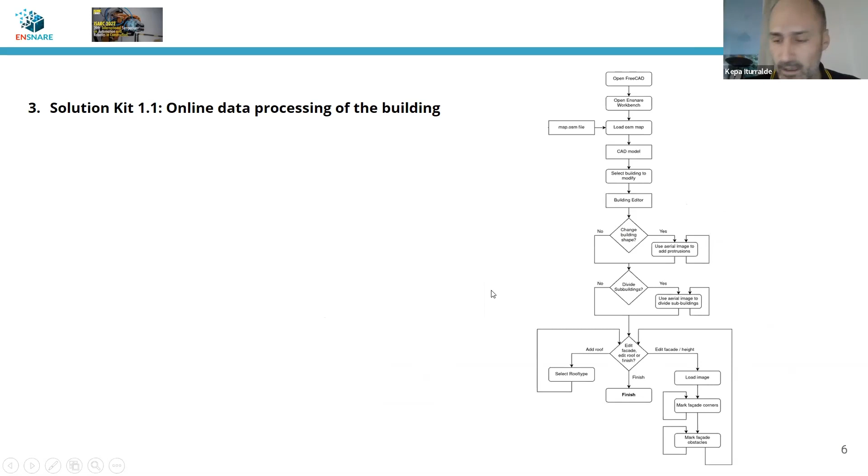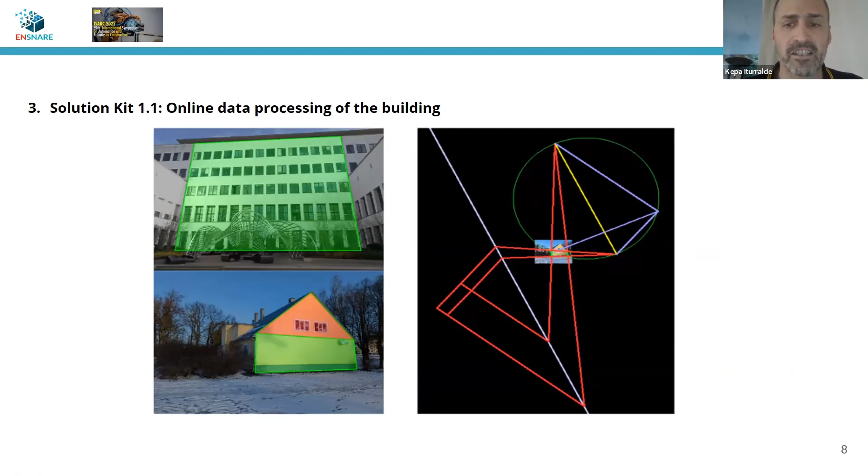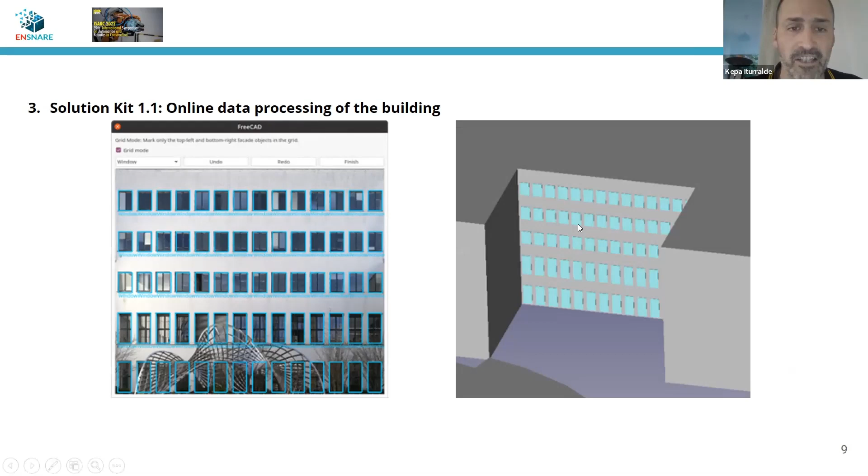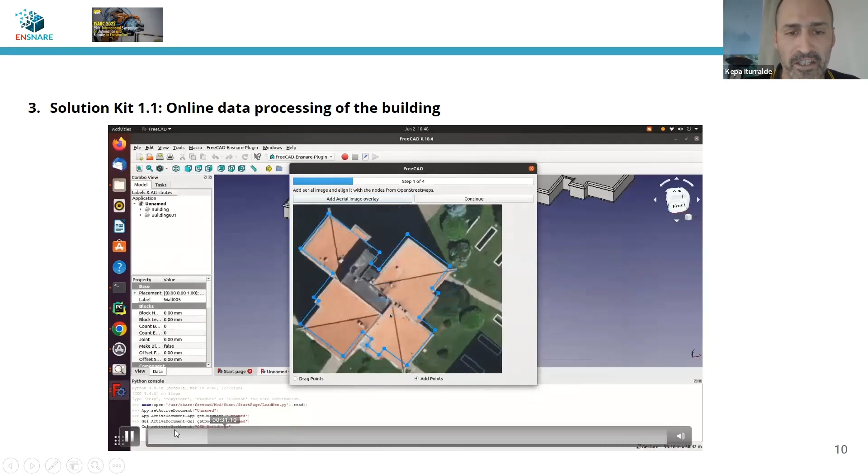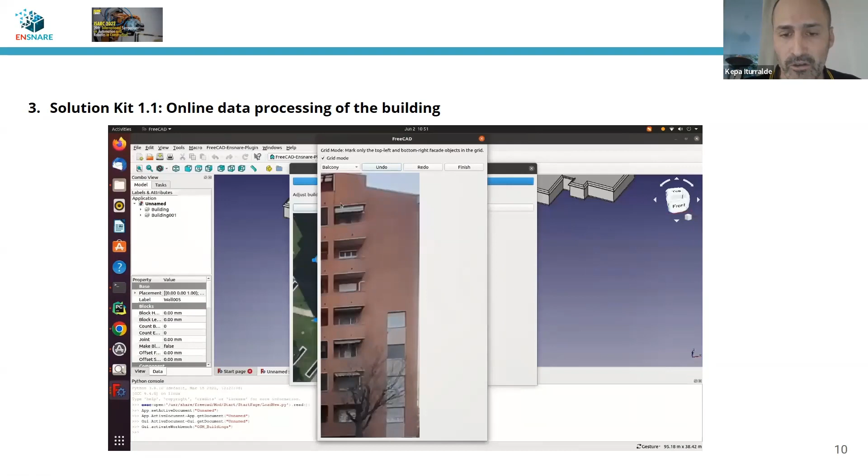So we first import the information from OpenStreetMaps. Then we use aerial data, aerial pictures, to match the OpenStreetMaps with the current information. We use pictures for defining the shape of the facades. We can select the windows manually. We are now in the process of recognizing the windows and balconies automatically, but not for this paper. We didn't have it ready yet.

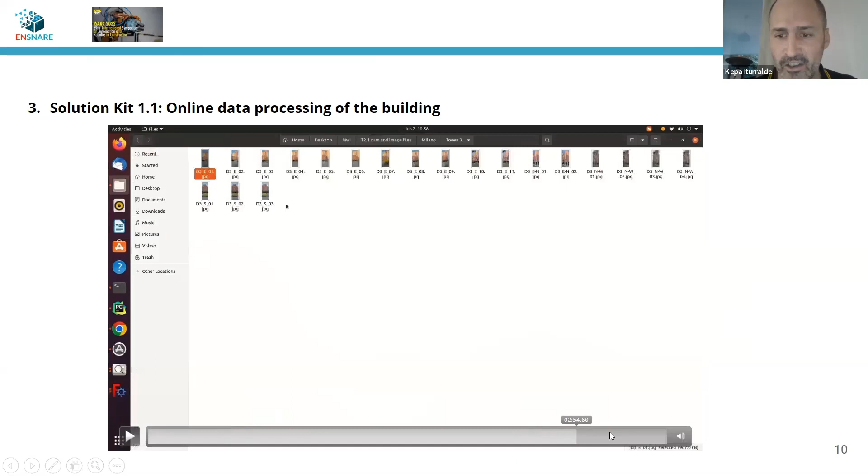We recognize it, and at the end of the process, we are able to define the building. So with the building already,

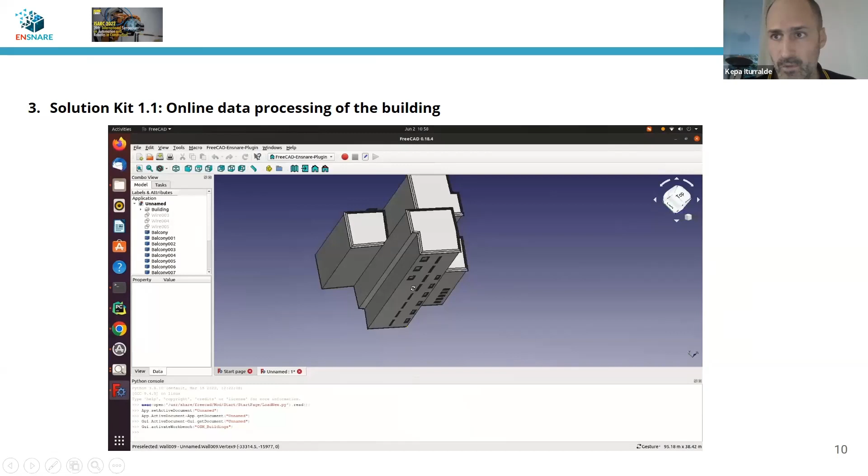One moment. My program needs to be restarted because of the video. 1 minute, please. Yes, go ahead. Take your time. Only one, I guess 1 minute. Okay. Sorry for this. I wanted to do this a bit faster. Okay, now you can see my screen again, right? Yes.

So we generate the building model. We have the building model already. And with this information, facade by facade, we can define the shape of the modules in a few seconds by an algorithm we developed. We optimize the amount of solar cells that can be added on top. The solar cells are not that problematic, but the hot water solar absorbers are quite problematic because they are standardized, they have a defined shape. So we need to optimize.

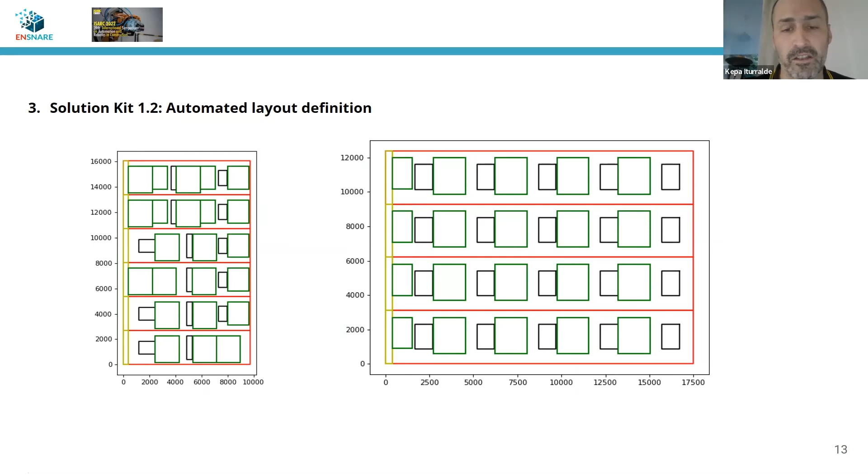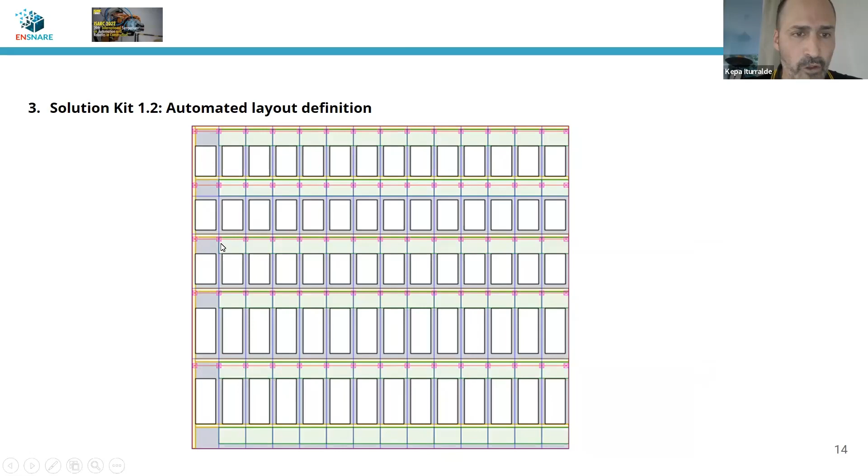In this project, we are using 12 different sizes, and you see here in green the algorithm we developed and how we optimize this shape to optimize the amount of area that we can cover with these solar absorbers. We don't only define in this process the layout of the modules, but also where the connectors should be. So we can say that the connectors need to be placed in that area, and we have developed, by using April tags and OpenCV libraries,

a way, by using pictures and not a total station, to measure more or less automatically the location of these targets or April tags. Again, those locations are where the prefabricated module connectors will be placed. And you might say, well, placing these connectors might take a lot of time, which is true. We realized in previous projects that this is a very time-consuming activity.

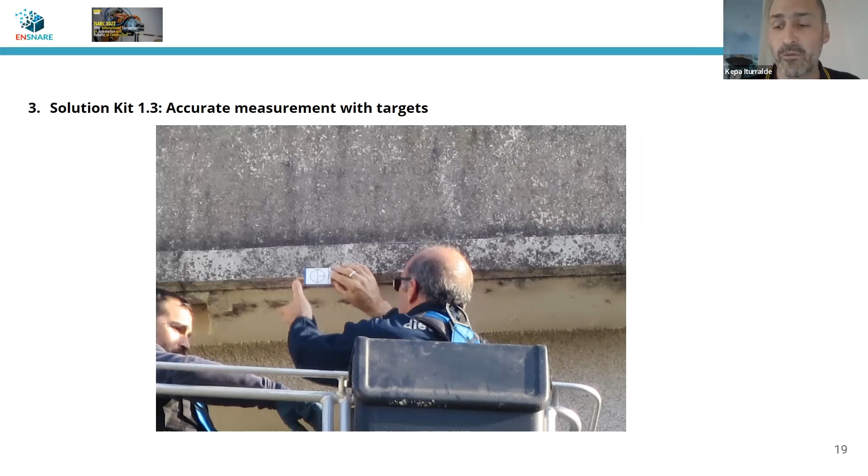We also used in the previous projects 3D point clouds and so on. I'm not very happy with the result of that because the accuracy was quite low. And that's why we are developing in this project also a way of using a drone for placing those targets. That's explained in the paper.

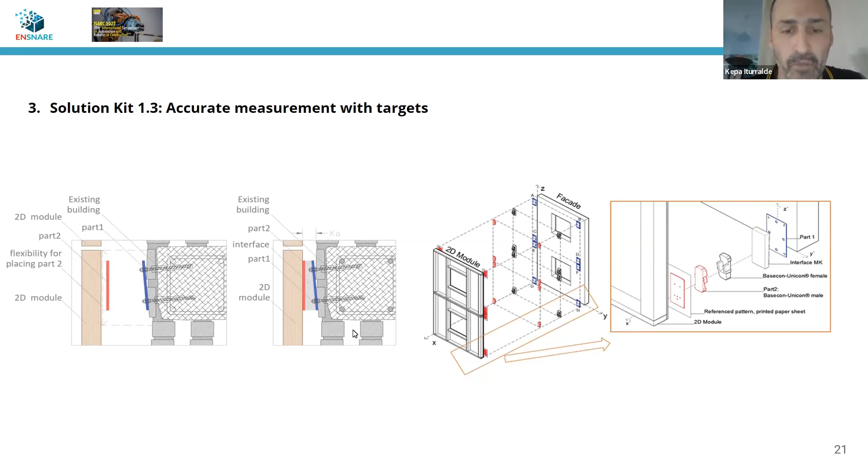We might have some inaccuracies while placing those first targets on the existing building, but then we can solve it using the so-called matching kit interface. But this is something that's already explained in previous literature.

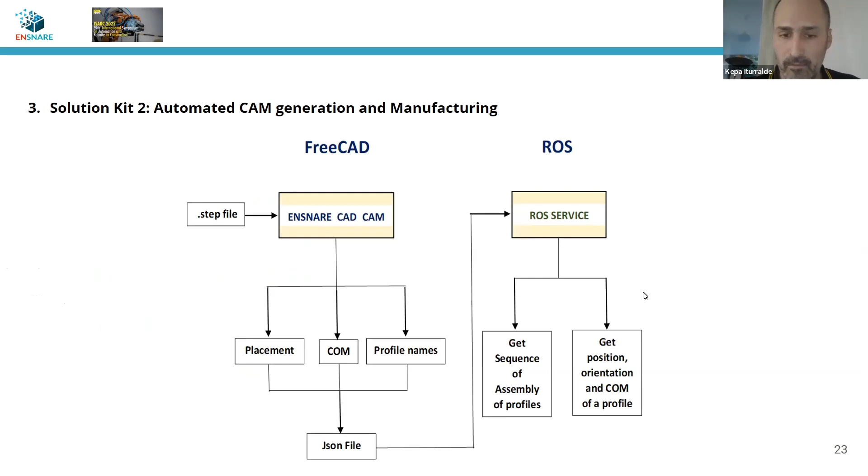So, two minutes to wrap up. With these prefabricated modules, we are also experimenting on how to automatically assemble the modules using robotics. First, we made some simulations in ROS, connecting every prefabricated module's CAD or drawings with the CAM of the robot.

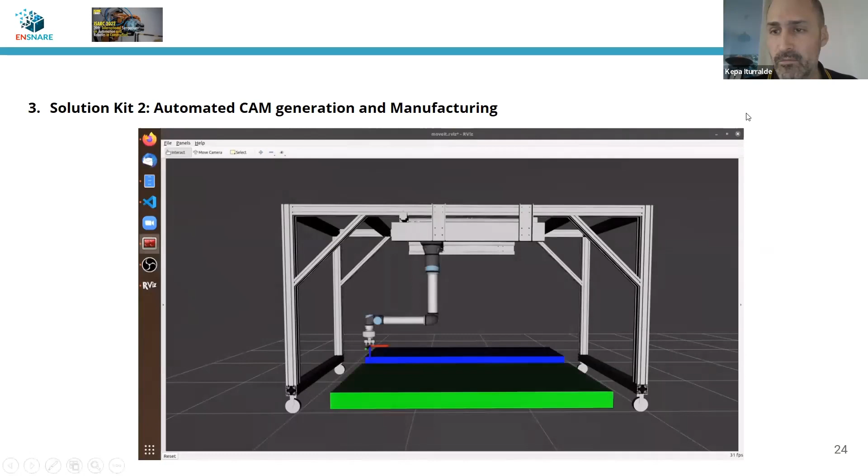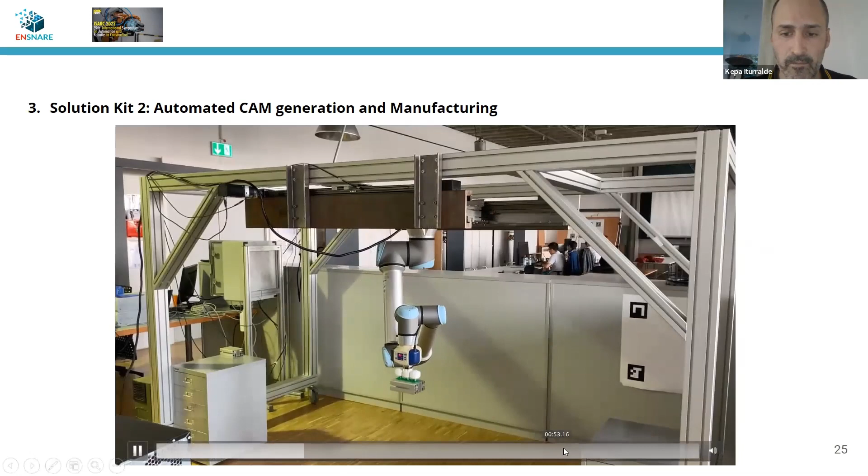And lately it's not only simulation. We have done some experimentation also in our lab. This is quite slow, but we are performing okay.

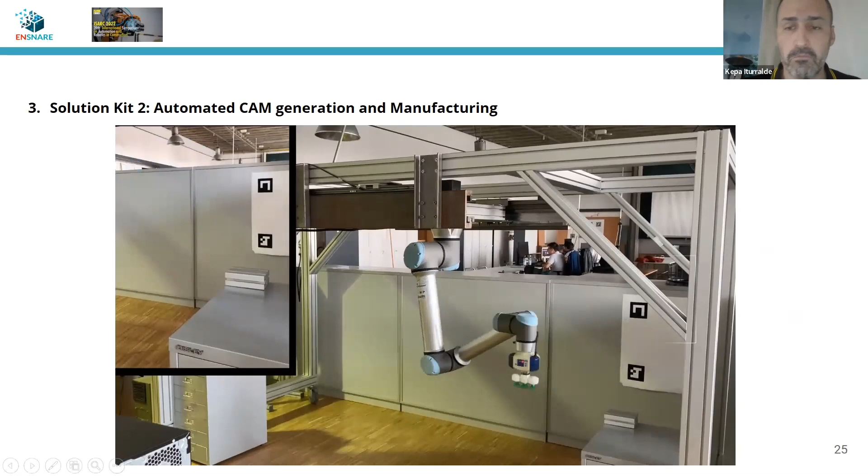Now we are in the initial phase, but this is all still a work in progress. Well, it was a work in progress when the paper was submitted. Now we have made some advances, and we are looking at how to get closer to the market by applying this technology.

So thank you very much. As I said, this is project-based research. There are plenty of partners in this research, and it is funded by the European Commission.

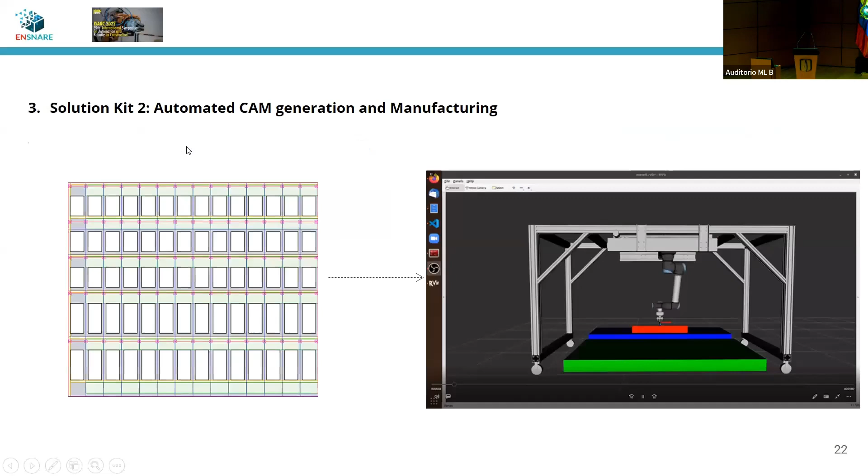This is Varun. Professor Dr. Kepa, I have a question. What are the pre-settling activities required for this kind of experiment to be done? I have seen your presentation at the last ISARC where it was presented as the best paper. What does a company have to do if we want to start on a new project?

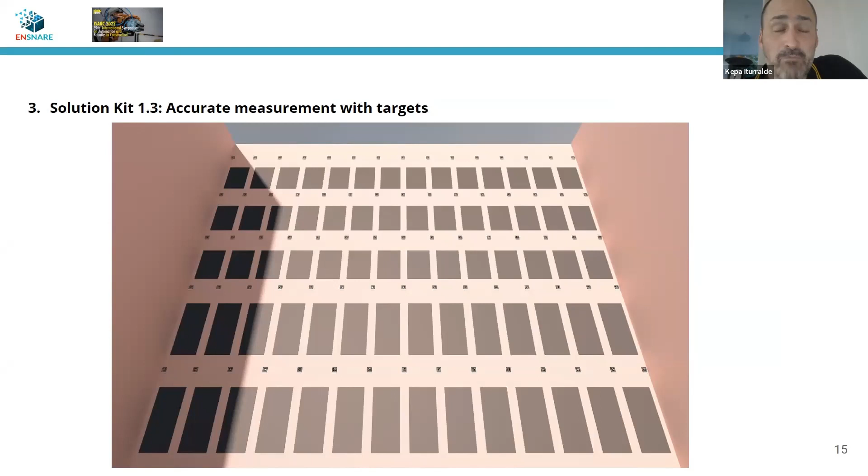Well, there are different aspects in this case. The previous project was based only on facade installation, but in this case it is for building renovation, facade building renovation.

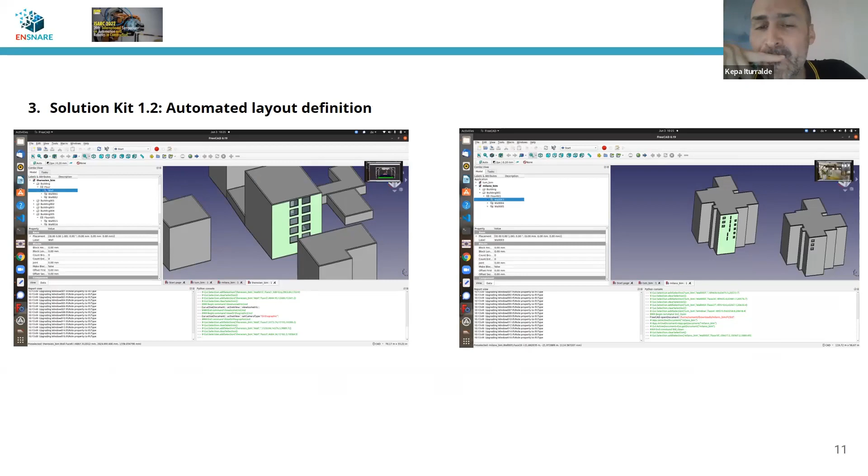Is your question what is necessary to get the project, or what kind of information we need for developing the facade? Okay, so my question is about practical implementation. Once you have all the things set up physically, if you want to install, what would be the stepwise pre-step procedure, like for installing the robot?

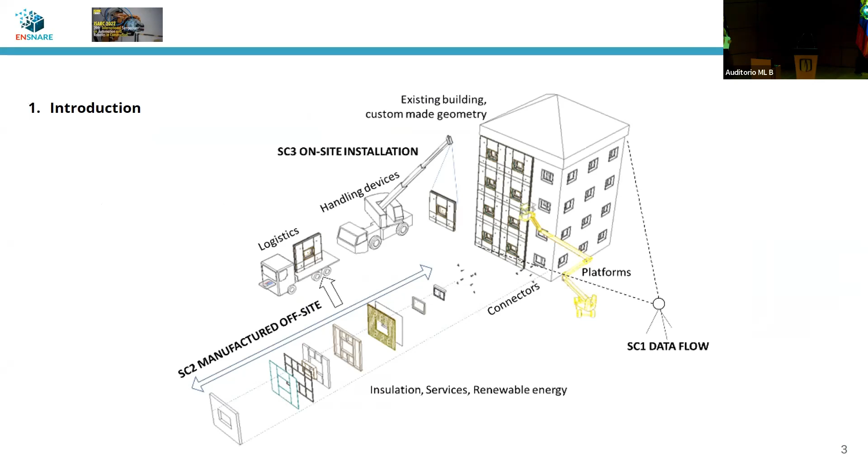Well, in this case, for the installation process, as you can see here, we are not using precisely an installation robot. We are using a crane, which requires positioning within the built environment. In the previous project also, the robotic device had to be positioned in regards to the built environment. In that case it was a building structure, but you need to position somehow because you have plenty of references, and you need to reference your robotic device in regards to the existing building.

In this case, we will use April tags at a known position to locate the crane in regards to this April tag. Probably the crane will have some April tags as well, and we will use a quite powerful camera to locate with sufficient accuracy the location of this crane.

But I would say in building erection, so in new buildings, not only in building renovation, the issue is the same. And it's the same in the rest of the industry. If you talk to facade manufacturers and installers, they are all the time struggling with the positioning of the connectors, the positioning of these elements.